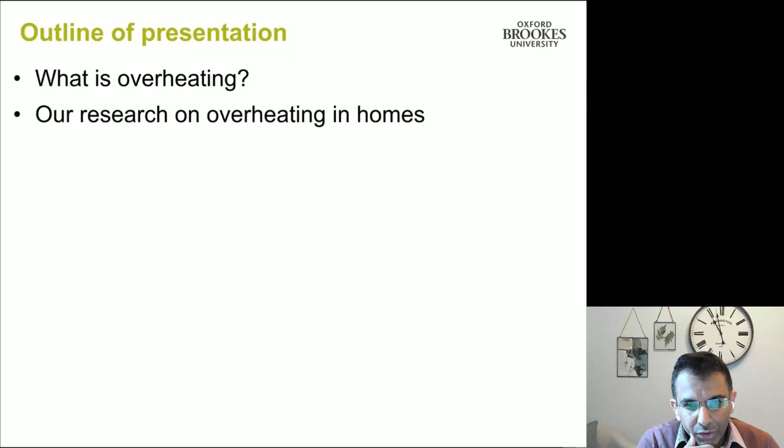What I'd like to do in the lecture is give you an outline of what I'm going to talk about. Start with what overheating really is, talk about our research on overheating in homes, our research on overheating in care settings, how you track this overheating risk, how you deal with overheating through good design, and end with some final thoughts, including knowledge gaps that need to be addressed.

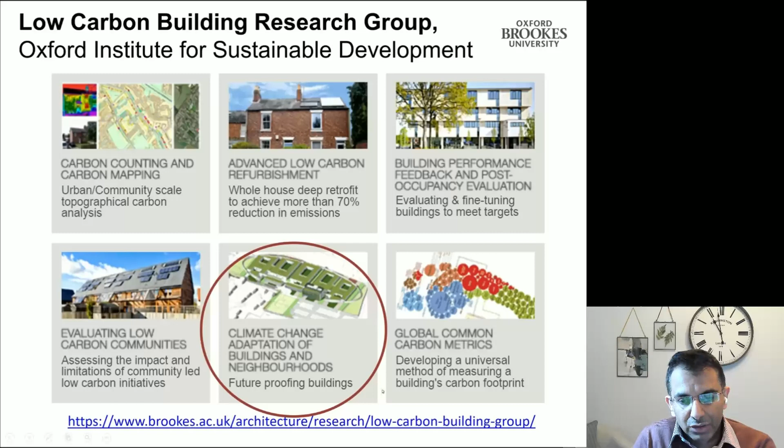Just a quick overview about who we are. I run the Low Carbon Building Research Group and the Oxford Institute for Sustainable Development at Oxford Brookes University. We have quite a few areas of research, but one key area is looking at climate resilience and climate change adaptation, both of buildings and neighborhoods. As part of that, we tend to look at overheating as well.

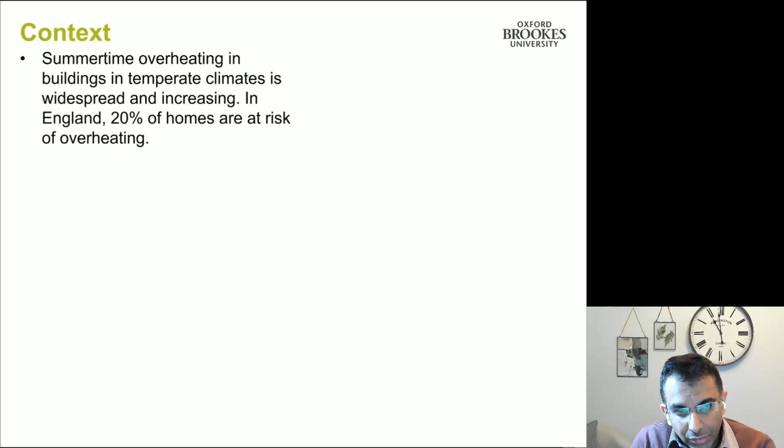Now, the first thing to understand is what overheating really is, because it's becoming a serious concern. This issue of summertime overheating in buildings in temperate climates is becoming widespread and increasing. We know that in England alone, 20% of homes are at risk of overheating today.

We also know that the research community and industry have revealed over the last several years the extent, severity, and causes of summertime overheating in different types of buildings, be it homes, care settings, schools, or offices.

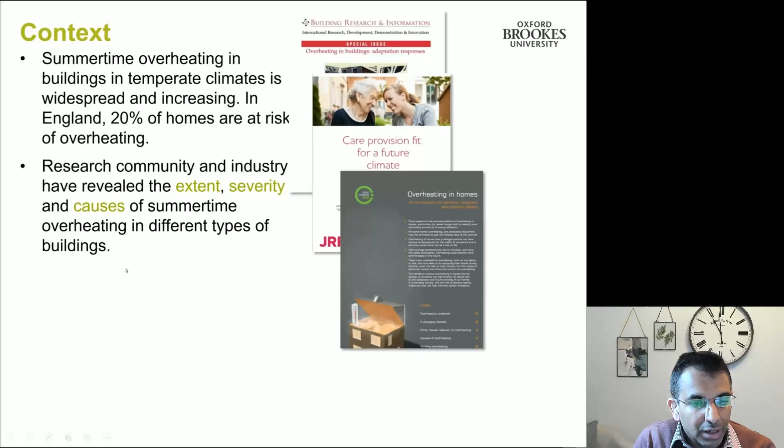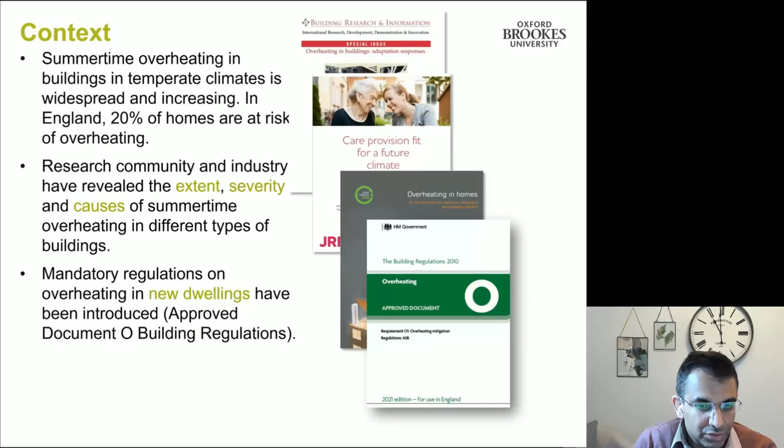We also know that recently government has noticed this, obviously, and has produced mandatory regulations to tackle overheating in new dwellings. This has been introduced through the approved document Part O of building regulations. But the Climate Change Risk Assessment report last year clearly stated that for existing dwellings, there's little incentive to retrofit adaptation measures to reduce overheating risk across the UK, and that really needs to be addressed.

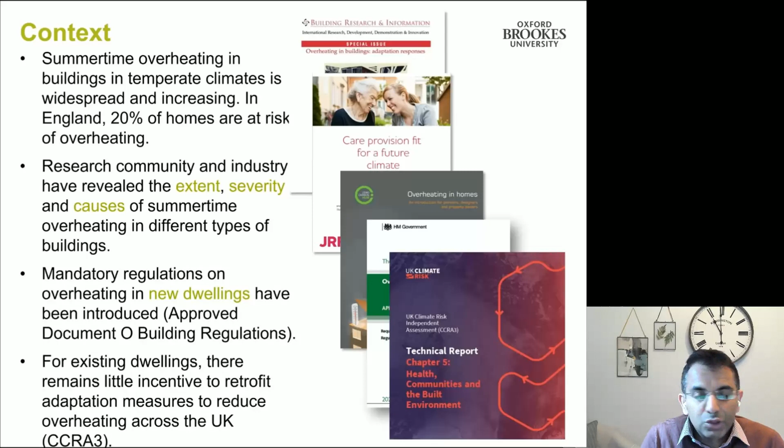This also becomes more evident as it was recently released that threshold temperatures for heat waves have been raised across the UK. In the south of England - Surrey, Berkshire, Buckinghamshire - 28 degrees is now the new limit for declaration of a heat wave, which goes down to 27 degrees in Lincolnshire and 26 degrees in Yorkshire. This happened because the weather year data being considered before was outdated, and now it's been updated to more recent data.

What this shows is that the recognition of when a heat wave is happening, the threshold temperature at which it's judged, is being looked at quite carefully, because that has a direct effect on the occurrence of overheating in buildings.

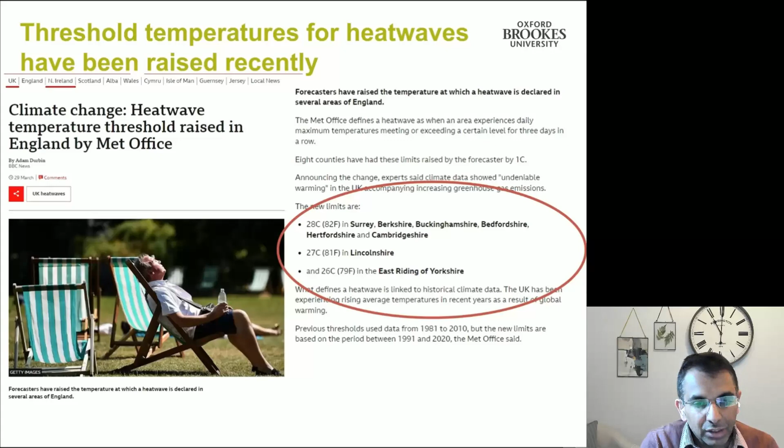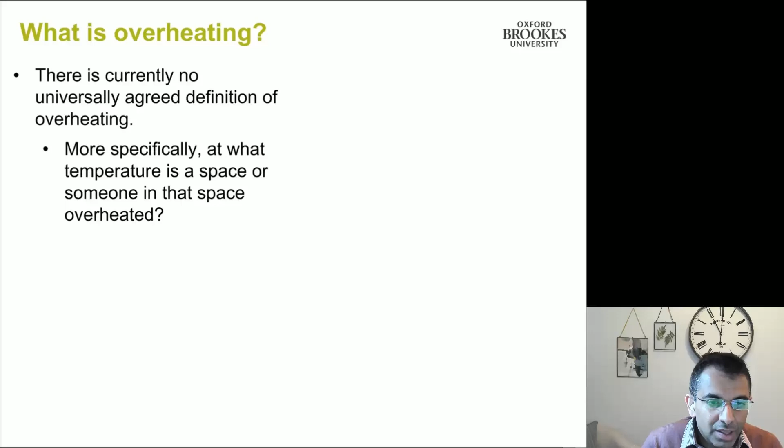Despite all this, there's currently no universally agreed definition of overheating, and more specifically, at what temperature a space or someone in that space is considered overheated. This will get worse as we have a warming climate and temperatures increase.

Overheating is already becoming a design problem for buildings, and it's going to get worse. What we don't want to do is build new homes and buildings today and only wait for them to be retrofitted for tackling overheating later on. We want to build that resilience now.

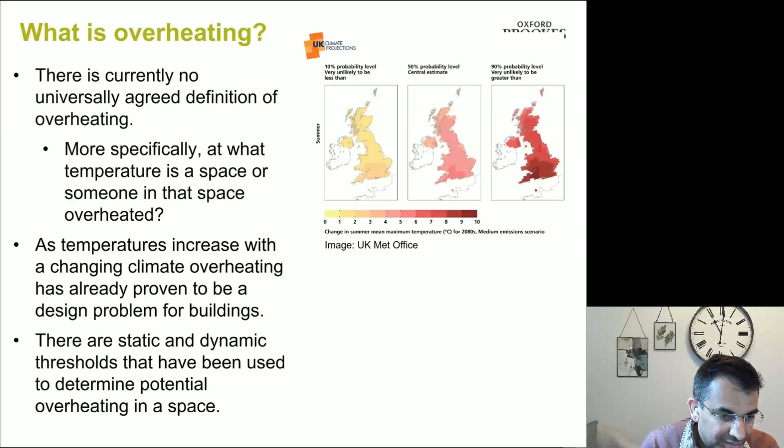There are lots of criteria for looking at overheating. I'm going to go into it shortly, but they could be static or dynamic. They really help in determining the potential risk of overheating in a space. There are several criteria for overheating.

There's CIBSE Guide A, which benchmarks summer peak temperatures and overheating using static thresholds: 26 degrees in bedrooms and 28 degrees in living rooms, whereas schools and offices have their own thresholds. Essentially, it looks at occupied hours over a year and says if more than 1% of annual occupied hours are greater than these thresholds, then the spaces are overheated.

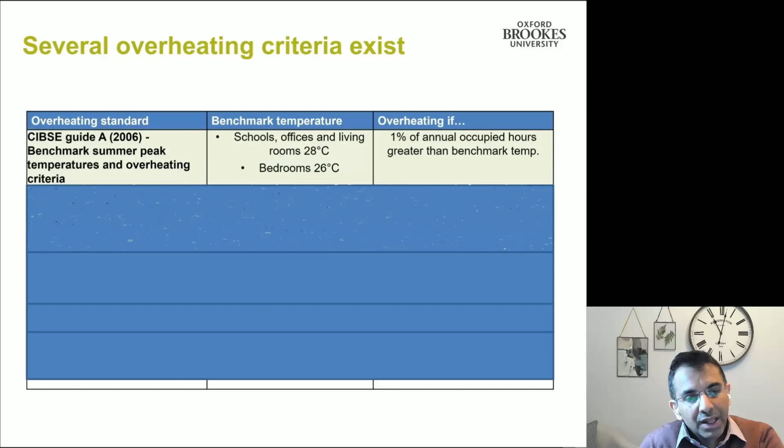There's also the more robust CIBSE TM52, which looks at criteria for defining overheating, mostly in free-running buildings. That relates overheating to the running mean outdoor temperature, which helps calculate the maximum threshold temperature, and then the measured or modeled temperatures are compared against those.

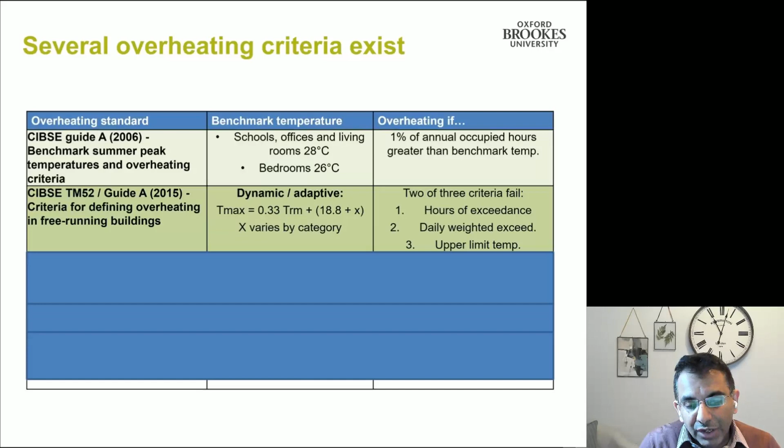If the internal temperatures fail two of these three criteria—hours of exceedance, daily weighted exceedance, or upper limit temperature—then the space is said to be overheated. But this is essentially for free running buildings where adaptive opportunities are available.

There's also the criteria from the Standard Assessment Procedure, which assumes 23.5 degrees C as the threshold, calculated for June, July, and August. If the mean internal temperature is greater than this threshold of 23.5, a high risk of overheating is predicted.

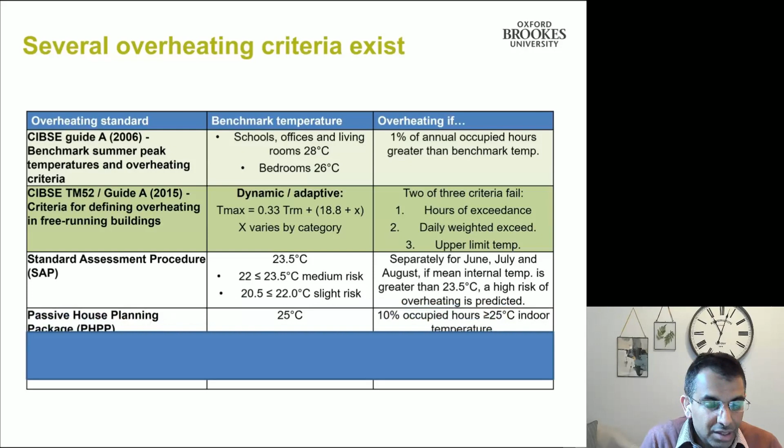Passive House Planning Package also has a threshold, which is 25 degrees. For the moment, it's saying that if 10% of occupied hours are over 25 degrees, then the space is said to be overheated.

There is also the Housing Health and Safety Rating System, which looks at 25 degrees C as the outside temperature and says that adverse health effects increase when external temperatures are more than 25 degrees.

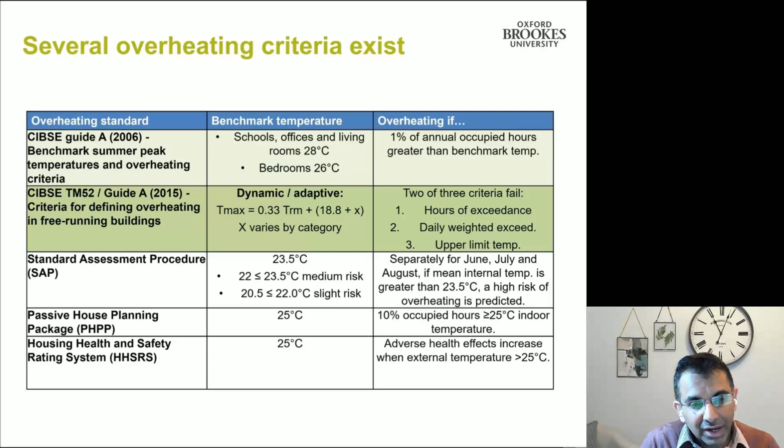So you can see that there's a range of criteria for assessing overheating, and that's also one of the problems. But this is getting increasing recognition clearly, and different criteria may need to be used for different types of buildings. There is some consensus coming up for UK dwellings, at least.

There was guidance released by CIBSE, TM59, which has really given the design methodology for the assessment of overheating risk in homes. This has essentially focused on thermal comfort in living rooms and bedrooms so that sleep is not disturbed. What TM59 is saying is that if bedrooms in the UK have over 1% of annual occupied hours over 26 degrees C, they are deemed to be overheated.

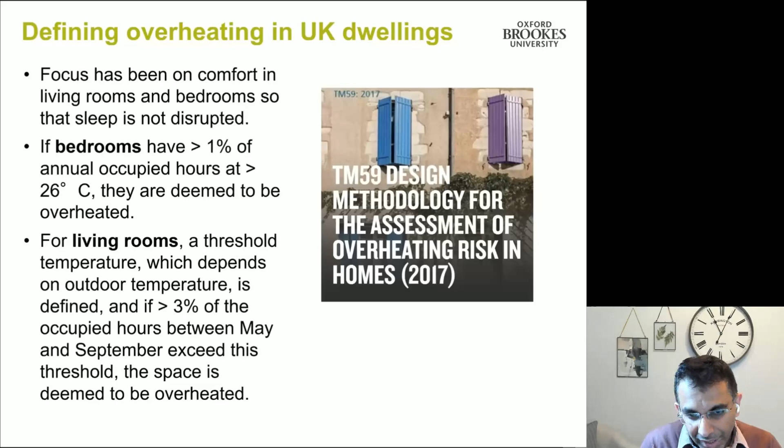For living rooms, a threshold temperature is defined which depends on the running mean outdoor temperature. If over 3% of the occupied hours between May and September exceed this threshold, the space is deemed to be overheated. So there's beginning to be a combination of static criteria and dynamic criteria in determining overheating in UK dwellings.

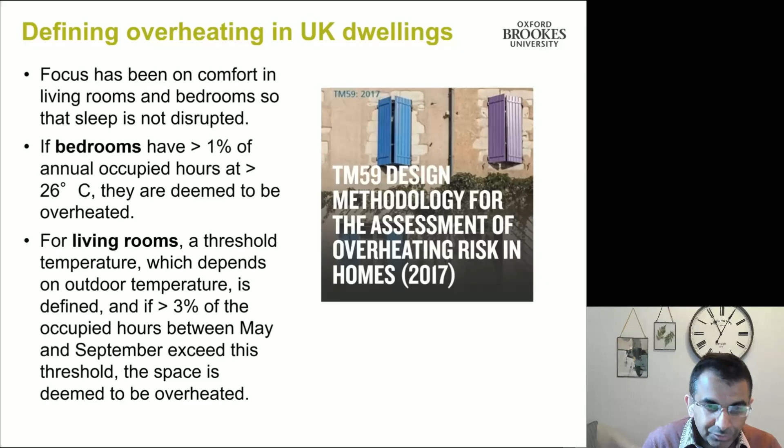Against this, we've been doing a lot of research on identifying the risk of overheating, both in existing and new build homes. We'll quickly run through some of our projects and then focus on a series of projects on care homes. But first on homes, and we started this really in 2009 when I was doing this EPSRC funded project called SNACC, looking at adapting neighborhoods for a changing climate.

We were using a well-established model called DECoRuM, which is a carbon mapping tool, to really look at the adaptation capability by using future weather data to predict the risk of overheating in neighborhoods.

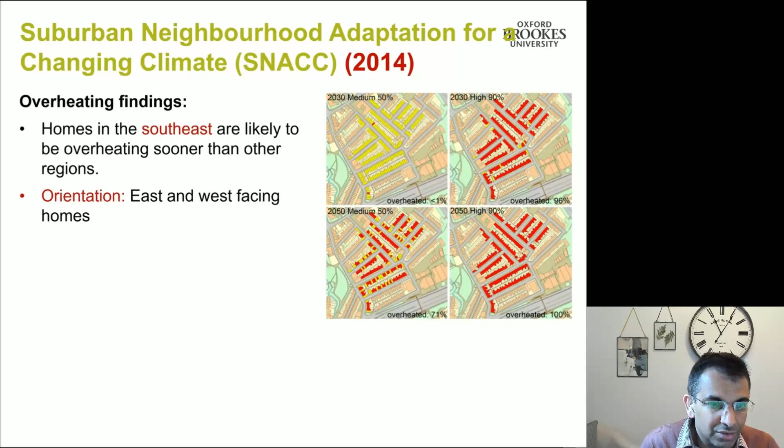Homes on exposed streets, those which have darker pavement, external wall and roof surfaces that are dark, usually increase solar energy absorption. Built form, having either or both a small floor area and limited external wall area, can lead to the risk of overheating.

The location of glazing—if you have roof lights, then you may have more chances of getting overheated. And of course, lightweight versus heavyweight home. So really, it's glazing, shading, ventilation that really mattered.

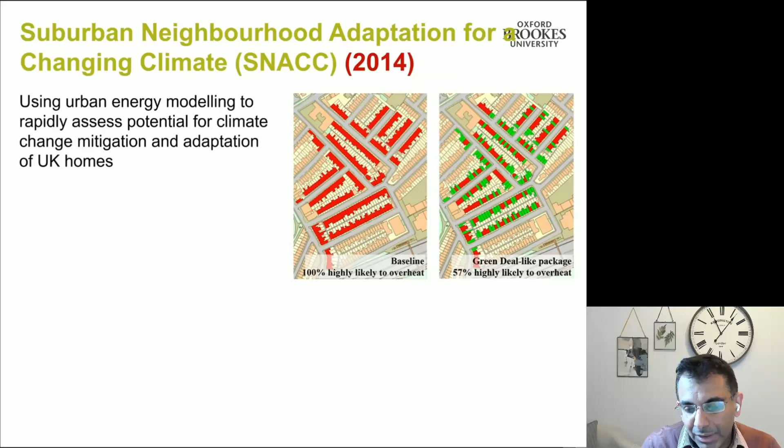We also used that urban energy model to assess the potential for climate change mitigation and adaptation measures, and you can see if those are deployed, then many of the red homes can become green. We used Green Deal at that time because it was seen as one of the retrofitting packages. Essentially what we found was that you need an external insulation package along with some shading and natural ventilation to provide resilience against overheating.

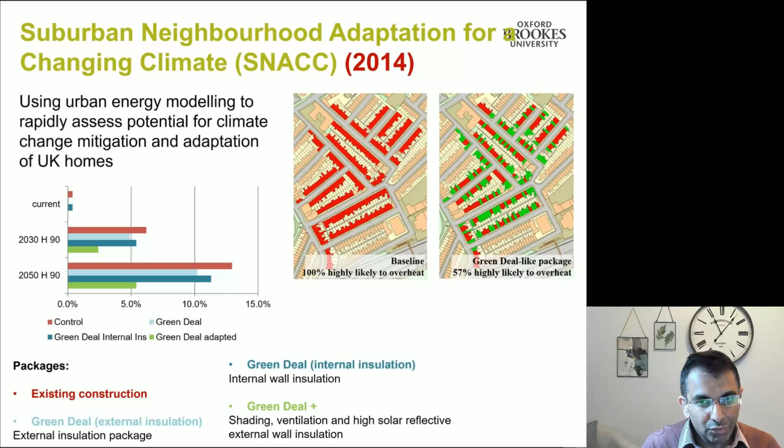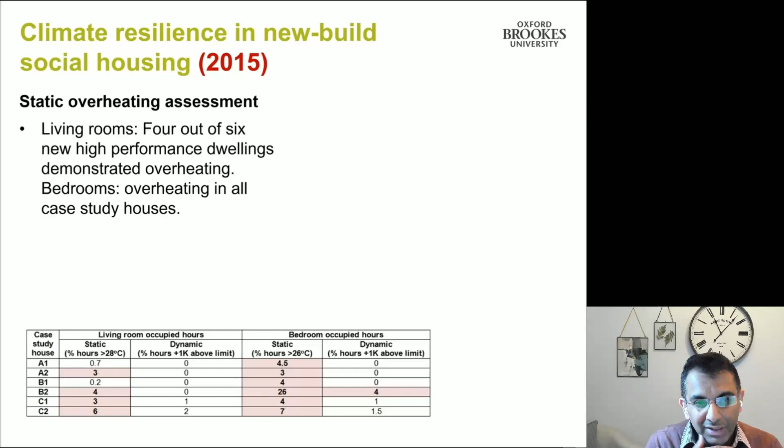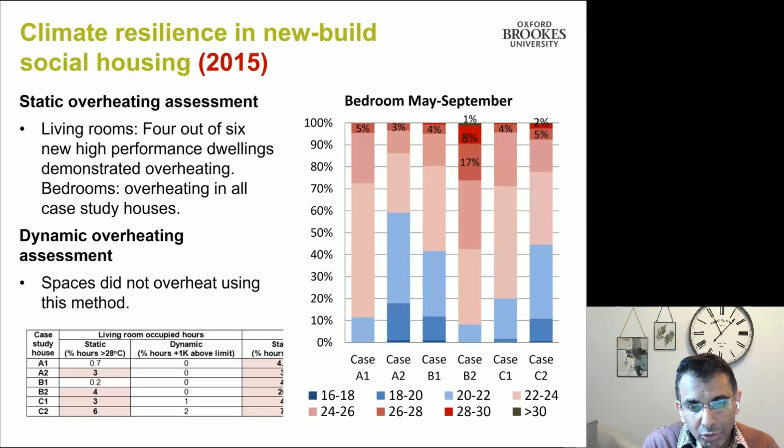This was 2014. In 2015, we looked at some new build social housing which had some vulnerable households, and we were looking at both static and dynamic criteria. The static criteria, which I find more stringent, showed 4 out of 6 dwellings were demonstrating overheating, and bedrooms were really overheating in all the houses. Dynamic overheating assessment showed the spaces were not getting overheated that much using this method.

We then continued this work and looked at more low energy homes across the UK, and interestingly, things started to become much worse in terms of overheating.

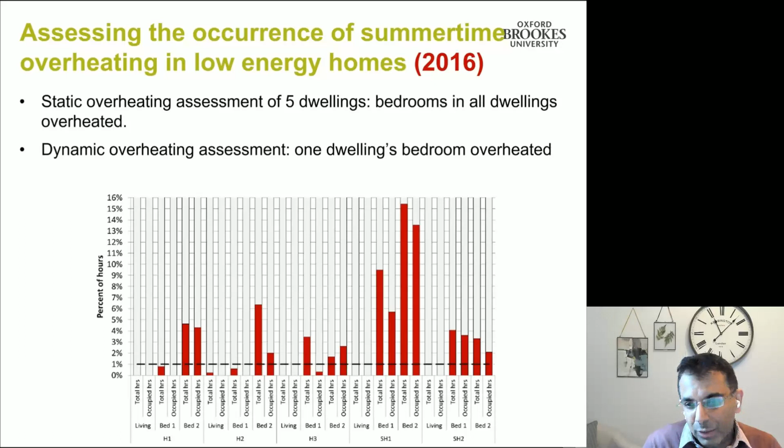Static criteria again: we looked at 5 dwellings and found bedrooms were again overheated. Then dynamic criteria said one dwelling bedroom was overheated.

We then looked at overheating risk in new build, retrofitted, and existing UK dwellings, and this is all published as a paper. We looked at 63 dwellings in terms of their monitored temperature, looking at bedrooms and living rooms, and we found some very interesting things.

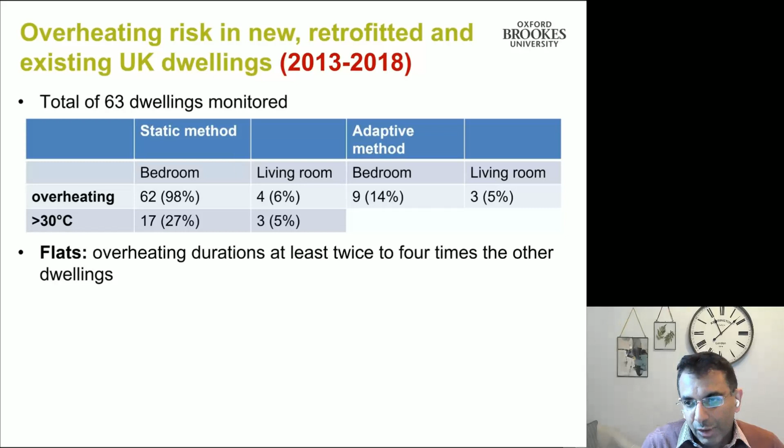The first finding was that in flats, overheating duration was at least twice to 4 times that of other dwellings, because of limited exposed floor area.

Mid-terrace houses have the highest degree of overheating in bedrooms. End terraces had the lowest levels because they could probably lose heat more than mid-terrace houses.

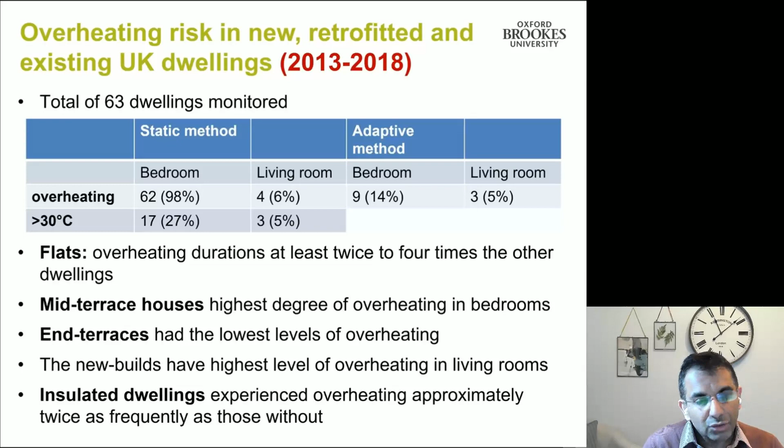New builds had the highest level of overheating in living rooms, and insulated dwellings experienced overheating approximately twice as frequently as those without. There are some interesting things coming out of this kind of meta study.

We continued our work and looked at some modern low energy flats in Surrey - quite expensive flats. We found that 3 out of the 4 flats studied overheated, and the fourth floor, top floor flats were overheated, but not the ground floor.

Overheating again was more prevalent in bedrooms than living rooms. Dynamic overheating assessment showed slightly less occurrence, but flats really stood out as spaces that overheated due to lack of cross ventilation.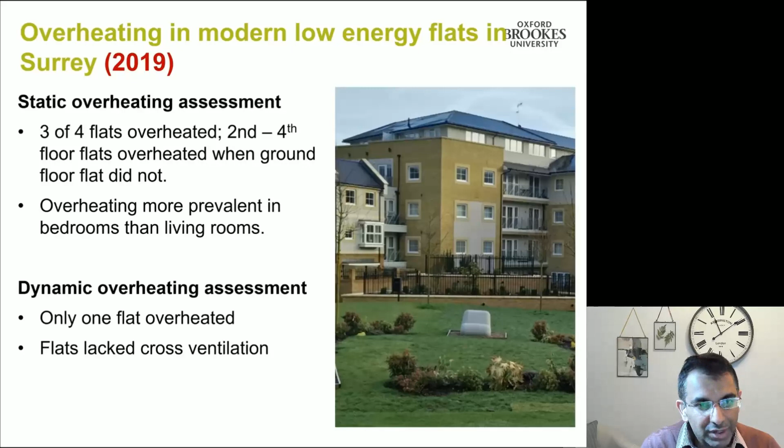We then also looked at another development in York. These were not flats; these were houses, mid-terrace and detached houses. Again, 4 out of the 6 dwellings overheated, with bedrooms again overheating more than living rooms.

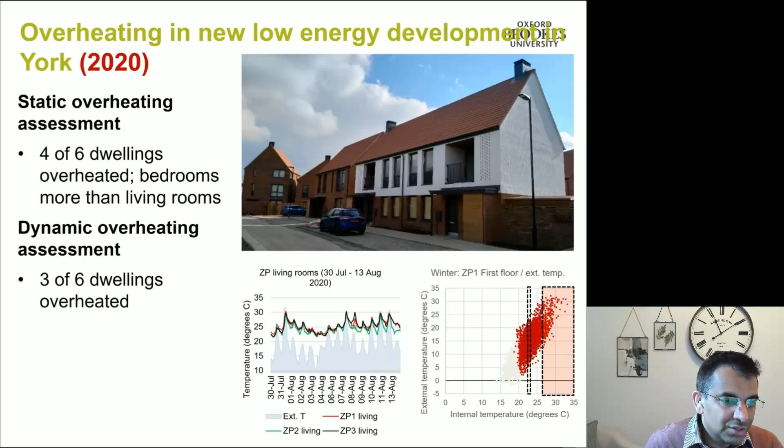This is a matter of concern, that spaces where people sleep during the night are actually overheated more. The dynamic overheating assessment again showed the same thing, that 3 out of 6 dwellings were overheated.

We then carried on with our work and went on to look at the risk of overheating in care settings, which, as we know, are quite vulnerable settings and need to be looked at carefully. The reason we looked at care settings was because there's a direct link between overheating, older people, and the care sector.

Heat-related mortality during heat waves has been found to be highest amongst occupants of residential and nursing homes, despite the presence of care staff that could act to protect vulnerable residents. So care homes are really vulnerable settings that need to be protected from summertime overheating.

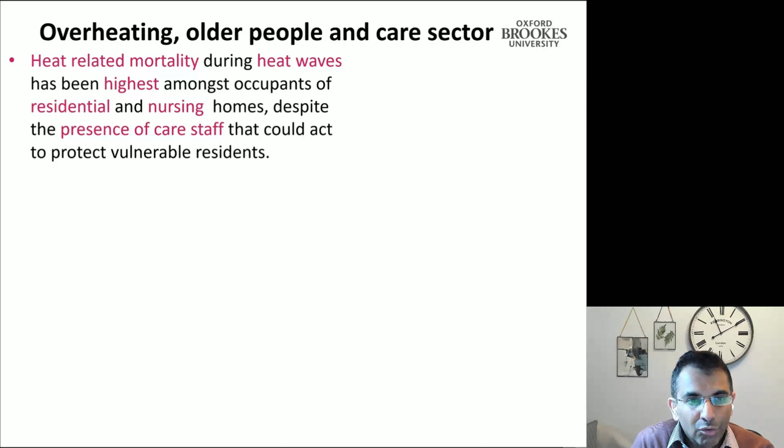This became evident in the previous climate change risk assessment report from 2017, and also the recent one, along with the National Adaptation Program, which has identified summertime overheating in care settings as a key risk and research priority for the health and social care system.

Vulnerability of care settings has of course been further exposed during COVID-19. If COVID-19 has proved to be a risk, I think overheating is also going to be a big risk as we move forward, especially for the care sector.

We also know that care homes are vulnerable to energy price increases, and many of these care homes are facing huge electricity bills, so maladaptation is not possible. We can't just say there's overheating, let's do air conditioning - that's not a solution. We have to go for increased passive ventilation or cross flow ventilation where we can.

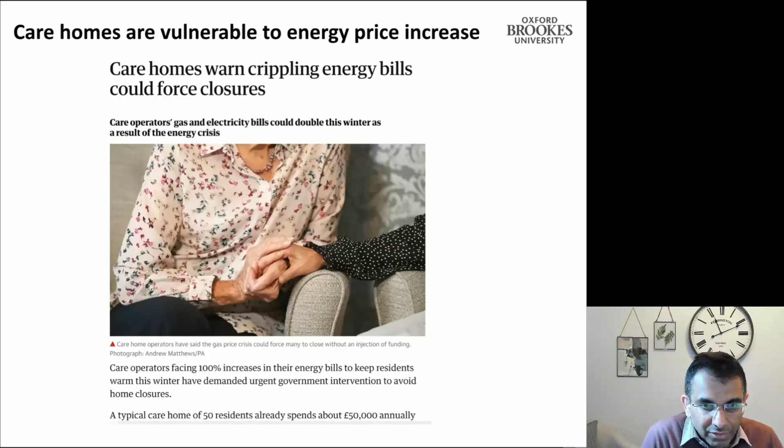Another problem is that care homes have been designed, built, and operated with the aim of keeping residents comfortably warm all year round, which probably requires a culture change, because in warm weather they might need to change ingrained practices in care homes.

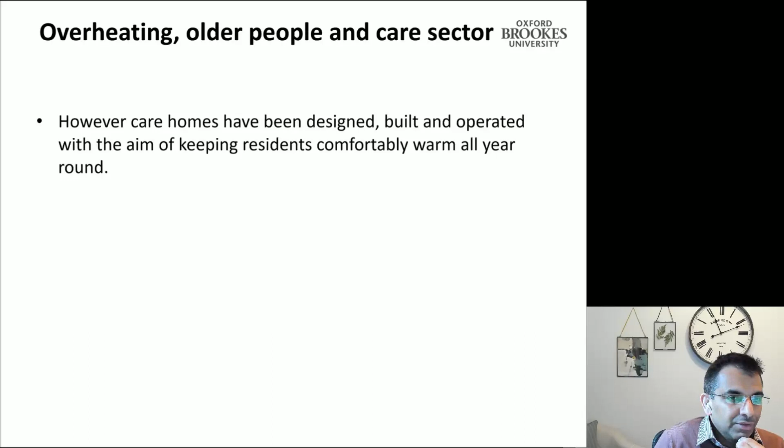There's also very limited research on assessing the prevalence of summertime overheating in care settings, both in the UK and internationally. There is a relative lack of empirical evidence there, which needs to be gathered.

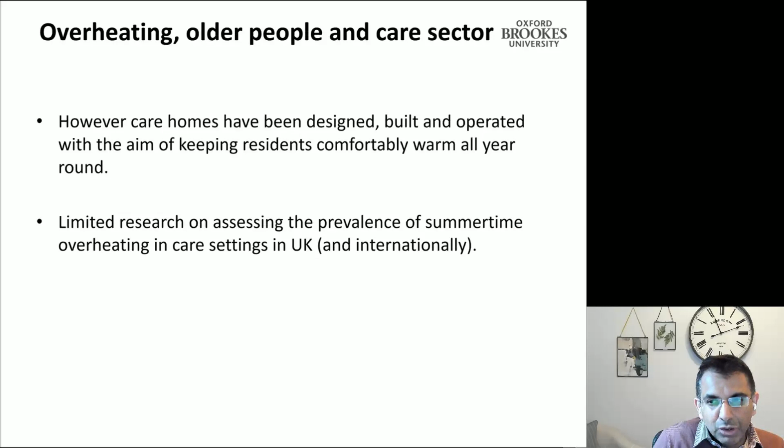Our work has really, since about 2015, focused on climate resilience of care settings. We've been undertaking a portfolio of work in this area. I started off by leading this project for the Joseph Rowntree Foundation, looking at 4 case studies across 2015-16.

We then went on to do a NERC-funded Research Council project, looking with partners at University College London and LSHTM, a pilot study of London-based care homes. Then another project looking at a nationwide study of care homes.

Starting with the first project, the JRF study, we looked at four care settings. Two are care homes across the country, as you can see, and two are extra care homes.

The difference between the two is that care homes are really single bedrooms with access to on-site care services, whereas extra care homes are more independent - rented or purchased flats or bungalows, designed for people with mobility difficulties, with some help and support available in an emergency.

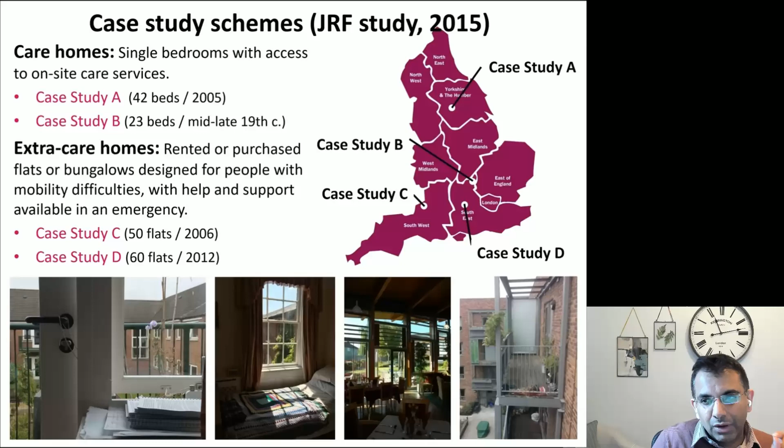So we looked at these four care settings. It was one of the first studies looking at overheating in care settings. And what we found is very interesting: most of the spaces are overheated, whether you look at adaptive method, dynamic method, or static method.

What we found is published as a report which is downloadable. For the static overheating assessment, we were looking at about 33 spaces, and out of those, 25 were overheated, with the highest overheating in the residence rooms. As per dynamic overheating assessment, slightly less, but 7 out of 33 rooms overheated.

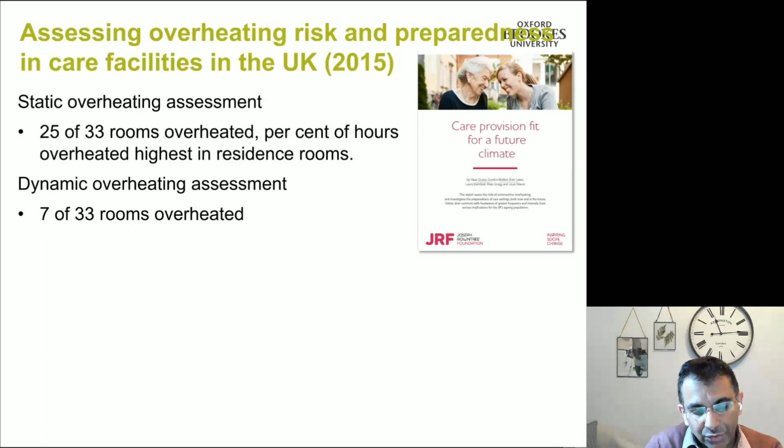Remember, in care settings there is relatively less scope for adaptation because health and safety and other concerns take over. So you can't open the window to the level you would want to - there are restrictors, it only opens about 100 mm.

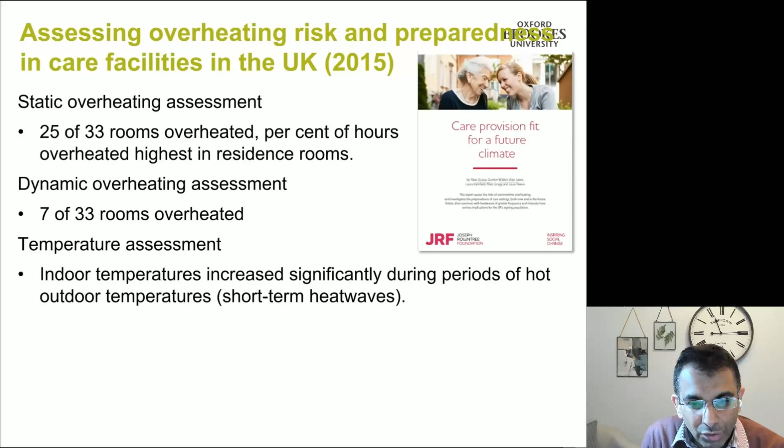When we went into detailed monitoring, we found that indoor temperatures increased significantly during periods of hot outdoor temperatures, especially short-term heat waves - not the heat wave I was talking about previously, over 3 days before one is declared, but really short-term occurrences of hot weather, and indoor temperatures increased significantly.

During the heat waves, none of the residential communal areas in the case studies remained below 26 degrees. Interestingly, that's the threshold temperature suggested by the heat wave plan for England, which says at least one area within the care setting should be below this temperature to provide a cool area to reduce the likelihood of heat-related illness. But none of the spaces we monitored remained below 26 - they were all higher than that.

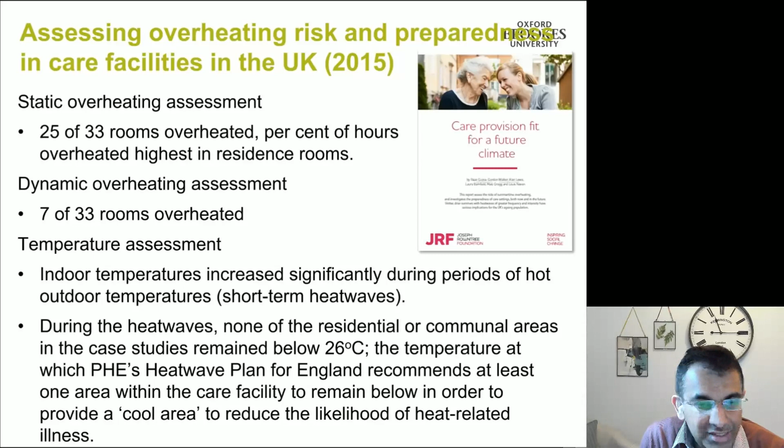So some very interesting results came from that first project, which led us to the second project with the Natural Environment Research Council, where we undertook a pilot study of care homes with support from the Care Quality Commission, the regulator of care settings. We did feasibility work developing new methods, knowledge, and insights to enable care provision to become more resilient to rising heat stress, using environmental monitoring, thermal comfort surveys, interviews with care staff and residents, and modeling to assess future overheating risks along with health outcomes of overheating.

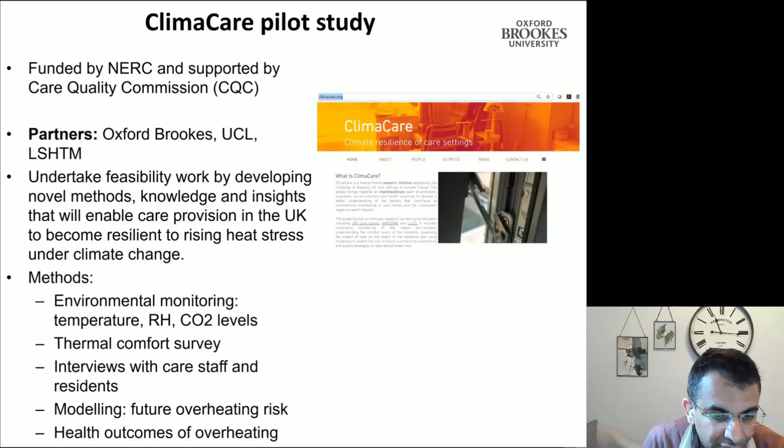We looked at 5 care settings across London. Some of them were quite old, heavyweight buildings, others were quite new, recently built, and some from the 1980s - so we had a good mix, with 5 care settings located in London but with very distinct characteristics of building age and building form.

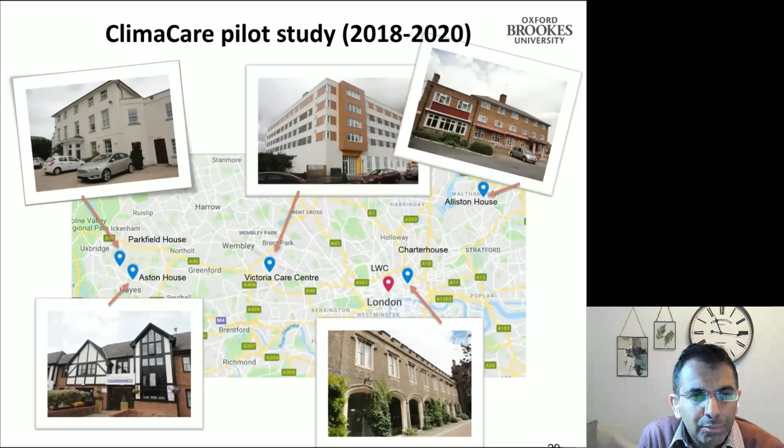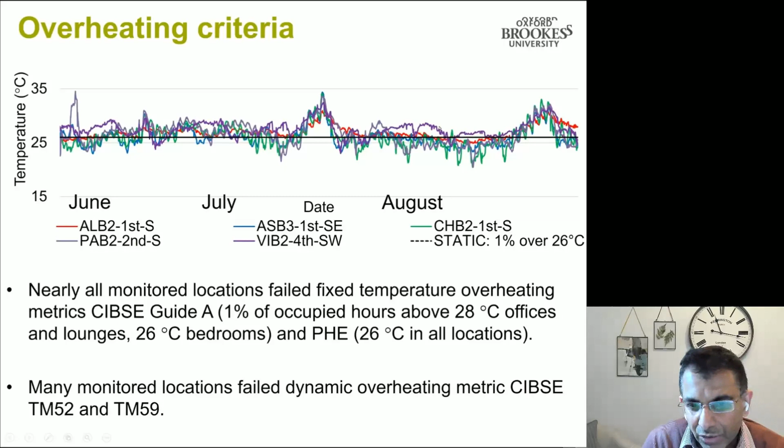What we found across all the care homes is really interesting - we did that in 2018-19 - that all monitored locations were having fixed temperature overheating using the CIBSE Guide A, with temperatures above 28 and 26 degrees for more than 1% of occupied hours. Many of these monitored locations even failed the dynamic overheating metric. You can clearly see the black line here is the static threshold, and how temperatures are above that across different spaces of care settings.

We also ran thermal comfort surveys, and some interesting things appeared. We were looking at staff and residents in care homes, trying to see the perception of comfort, and found there was disparity between indoor temperatures that staff considered warm and hot, and those that residents found warm and hot. Residents were not perceiving higher temperatures as much as staff, who were more active.

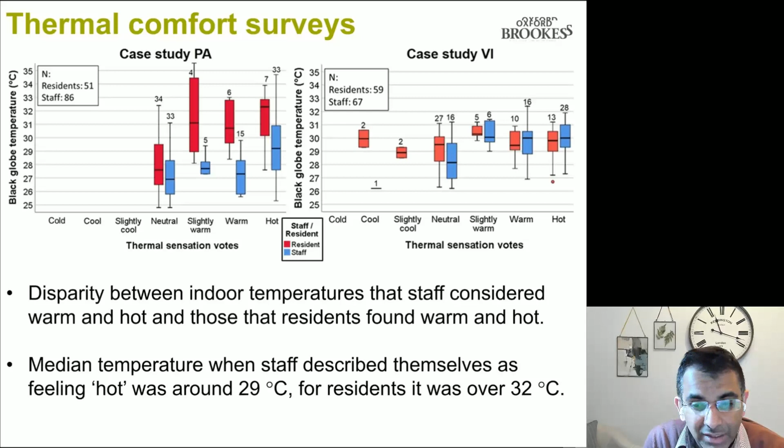The median temperature when staff described themselves as feeling hot was around 29 degrees C, while for residents it was 32 degrees C. So you can see that some external action is necessary, because residents are not able to identify when the threshold for overheating gets crossed. Care settings are such hybrid buildings - they've got residents and staff with quite different expectations of the indoor thermal environment.

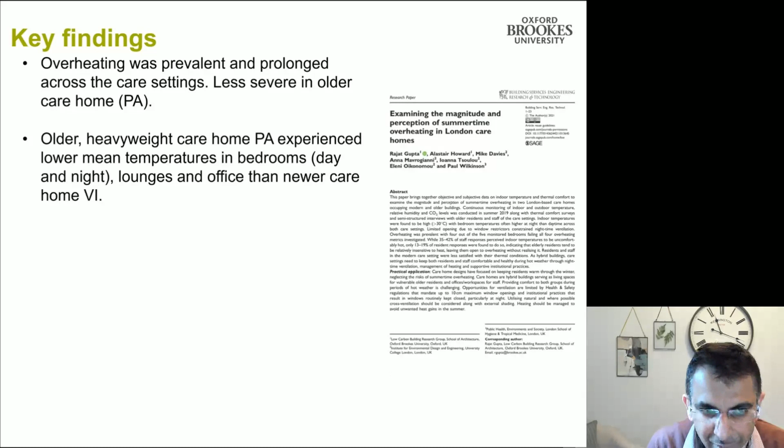The key findings from the pilot study of 2 care homes, building upon the first JRF study, was that overheating was found to be prevalent and prolonged across all the care settings. Interestingly, it was less severe in the older care home, which also offered scope for ventilation. The older heavyweight care home experienced lower mean temperatures in bedrooms and across different spaces, lounges and offices, than the newer care homes.

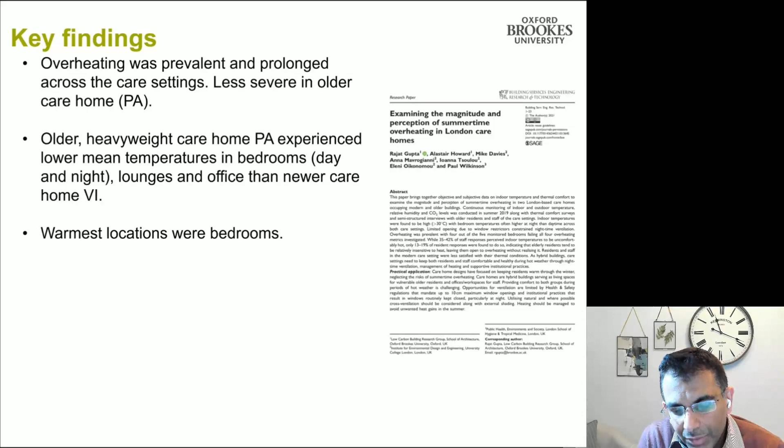Across all the care settings, the warmest locations were the bedrooms. I think it's really interesting that even in the homes, we found bedrooms to be the warmer spaces, and even in the care settings, they're coming across the same. Average bedroom temperatures were higher at night. Again, it's not that bedrooms overheat more than living rooms, but the temperatures are higher when you're sleeping.

This was because bedrooms were occupied with doors and windows closed. They had single-sided ventilation. Carers would spend time in lounges more than in bedrooms, and they were more likely to implement strategies for cooling when in the lounges. So you can see that it's a combination of the physical aspects of the care setting along with the practices deployed in care settings that is really accentuating this risk of overheating in care homes.

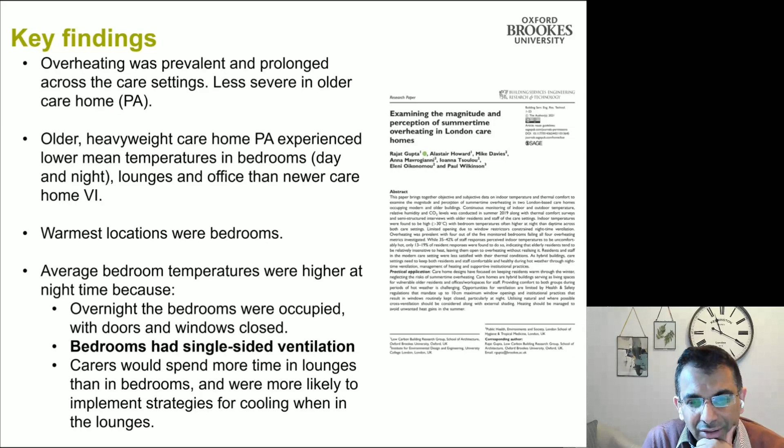The ongoing project that we're doing is an extension of the pilot study from NERC, and this is a nationwide study that we are doing. This is still happening, it goes into 2023. It's again Oxford Brookes, UCL, LSHTM doing it together. We are trying to quantify climate-related heat risk in care provision at a national scale, moving on from a case study based to a national kind of study.

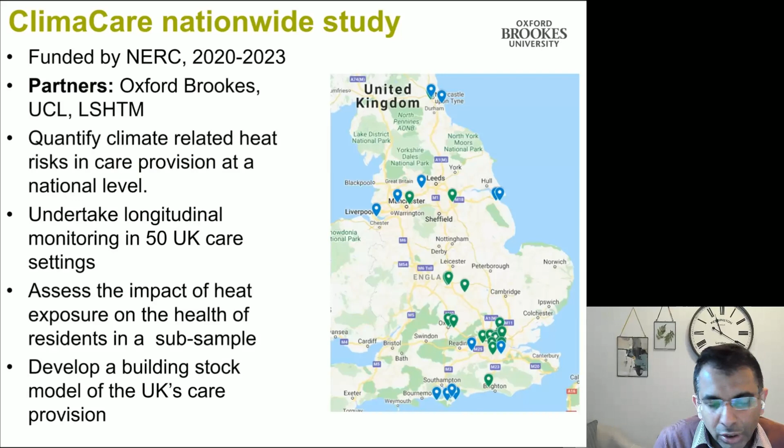We are doing longitudinal monitoring, and our aim is to do 50 care settings. We've got about 34 recruited at the moment. We are assessing the impact of heat exposure also on the health of residents in a subsample, and using all this empirical data to develop a building stock model of UK's care provision.

These are some very preliminary results looking at some of those care homes that we recruited. These results are from August, September 2021, so they're not really peak summer, it's towards the end of the summer. What's really interesting is that the maximum temperatures are going above 29, hitting really 31 degrees in some of the bedrooms. And this is not even kind of summer, it's towards the end of the summer. We'll have better results from this summer.

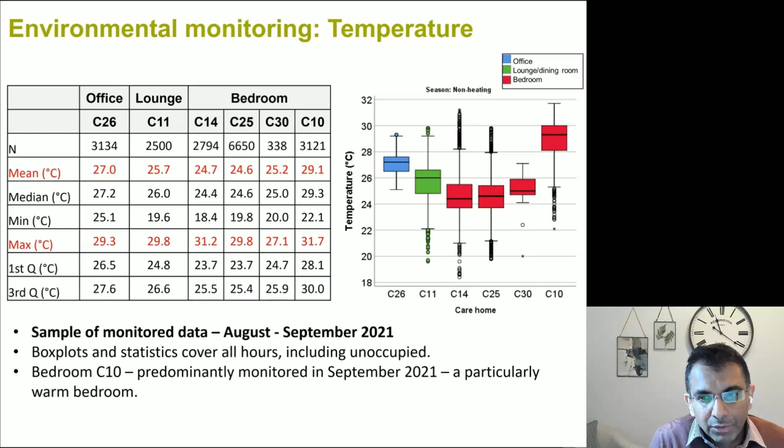Predominantly, the bedroom C10 is a pretty warm bedroom that we found. I think it's worth noting that this is really happening because of limited ventilation that's happening across these spaces.

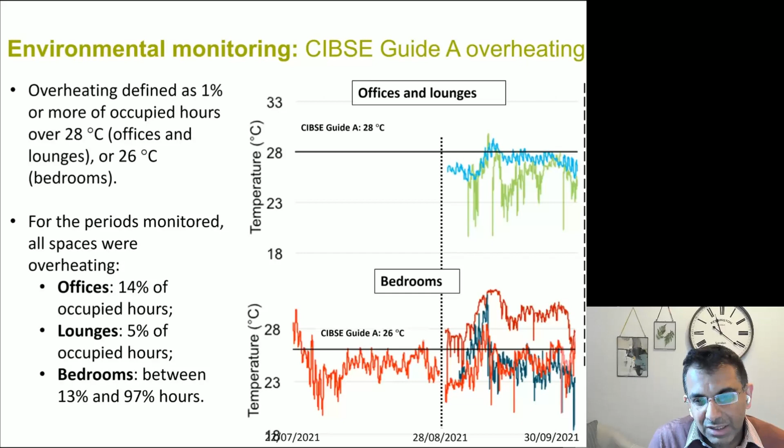Then we looked at the overheating risk, and again we looked at static criteria for care settings, and we found that for the periods monitored, all spaces were found to be overheated. Offices had 14% of occupied hours that were overheated, lounges had 5%, and bedrooms were between 13 and 97%. So clearly this is a current and serious risk that needs to be tackled.

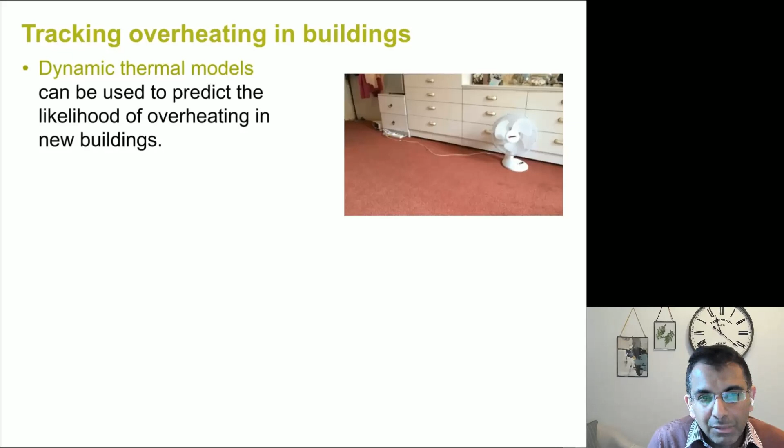So how do you first track overheating? I think one of the ways I would suggest is by developing indicators. Government is very interested in this, and this also helps in really seeing what is happening. The way it's tracked at the moment is dynamic thermal models are used to predict the likelihood of overheating in new buildings, and measurements and inspections are used to identify overheating in existing buildings, which is what, to some extent, we have been doing as well.

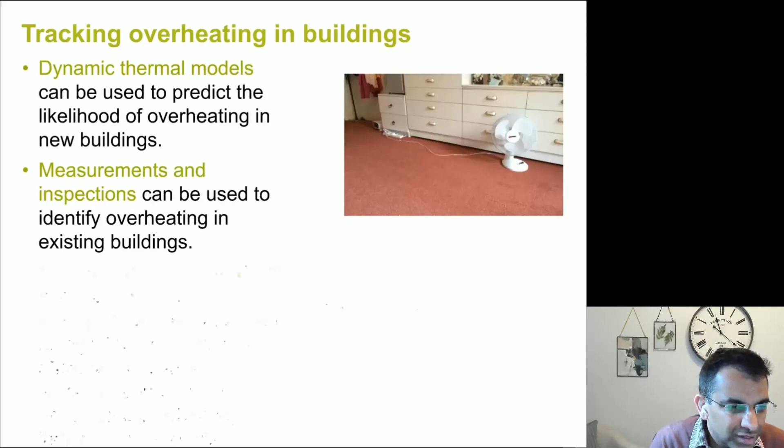The physical form of buildings matters, definitely, but I really want to emphasize that the way people occupy them is equally important, along with changes in the climate. So a socio-technical approach to developing overheating indicators is probably necessary. There are some indicators out there which are being used and considered through the climate change risk assessment as well, and they range from areas of urban green space to heat-related deaths per year.

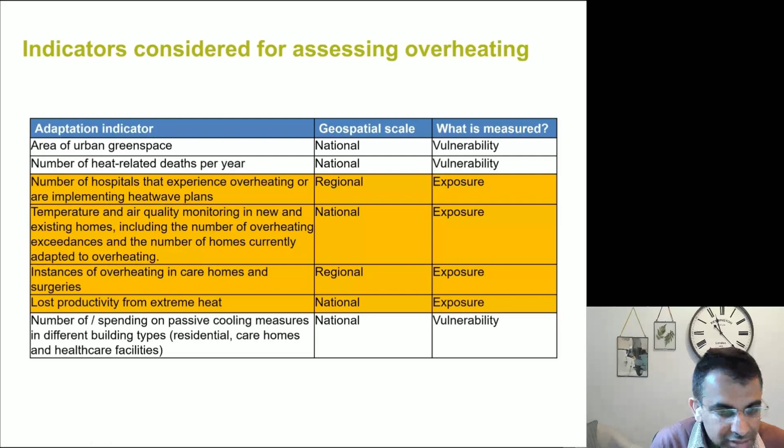But from a passive design aspect, number of hospitals that experience overheating or are implementing heatwave plans, instances of overheating in care homes and surgeries, lost productivity from extreme heat, and temperature and air quality monitoring and how much of that is prevalent across different care homes could also be tracked. This I find really interesting: number of and spending on passive cooling measures in different building types, care homes, healthcare facilities, that could also be used as one of the indicators. We tend to look more at heat-related deaths as an indicator, but what I'm arguing for here is there are other indicators as well, such as those passive cooling measures.

So how can you tackle this through passive measures and user-centric operation? I would say presence of cross ventilation is essential. We need to look at extent of window opening.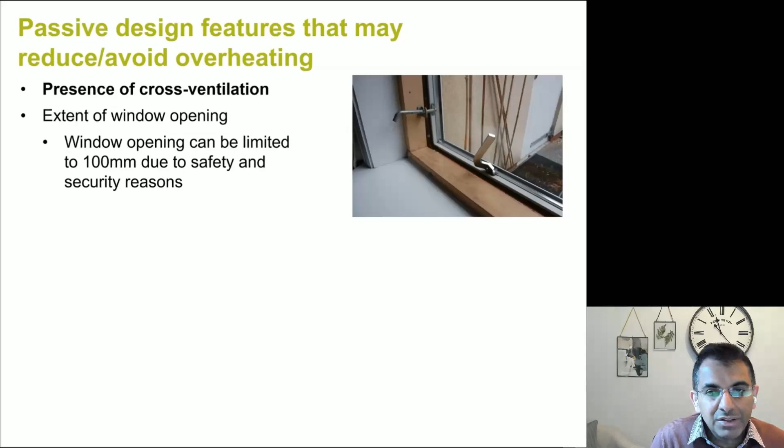This can be limited to 100, as I said, due to safety and security reasons, but this needs to be looked at carefully.

Presence of thermal mass in heavyweight buildings will make a difference. External shading will matter, especially on the south, west and east facing facades, and can be of different types. Shallow plans are preferable rather than deep plans, and light colored surfaces on the outside would radiate heat off the building.

Corridors need to be adequately ventilated, because often they're a route for hot water pipes, and there's a lot of chance of unwanted summer gains from those pipes. Not just at the building level, green and blue infrastructures, planting and water features can also help reduce urban heat. Those are some of the passive measures that really need to be looked at.

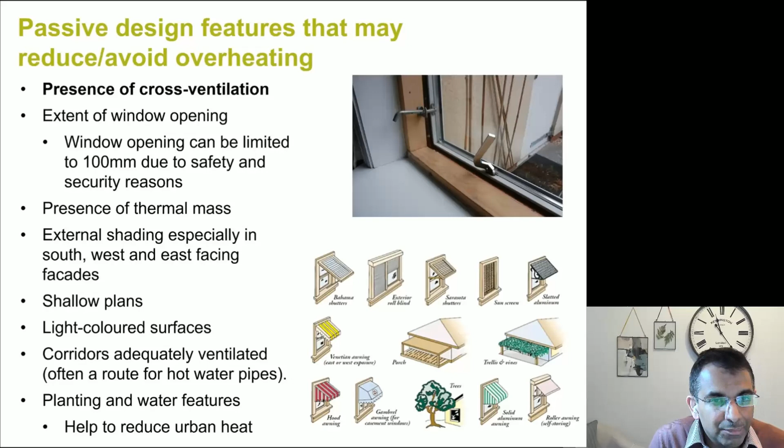Ventilation here is key. Then, not just the building, we also have to empower occupants to manage overheating, and there are various ways of doing that.

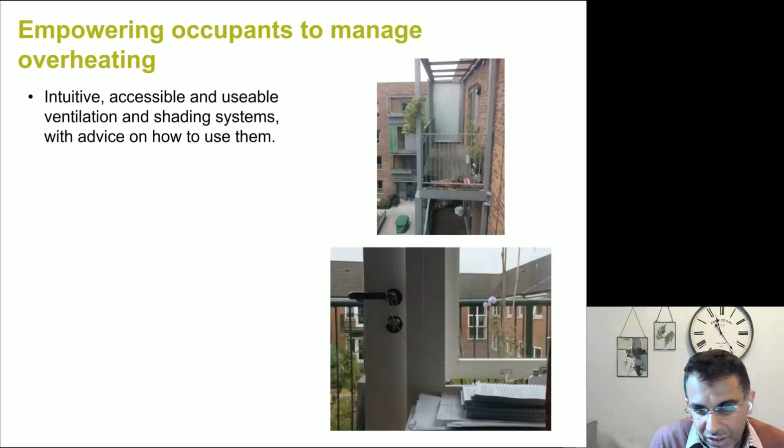We need an intuitive, accessible, and usable ventilation and shading system with advice on how to use it—sometimes it's counterintuitive. We might need openings of different sizes to offer flexibility, some that people of certain age groups can open easily, and we need user manuals on staying cool in summer.

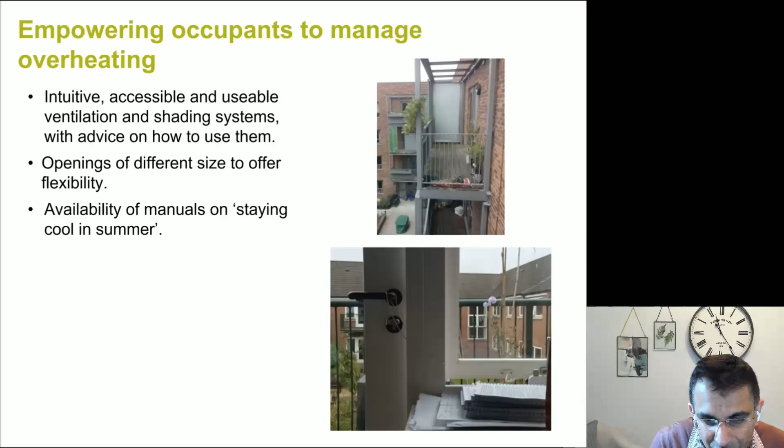We also need provision of shaded balconies or other communal spaces where people, especially vulnerable occupants, can escape from heat—what we call cool rooms.

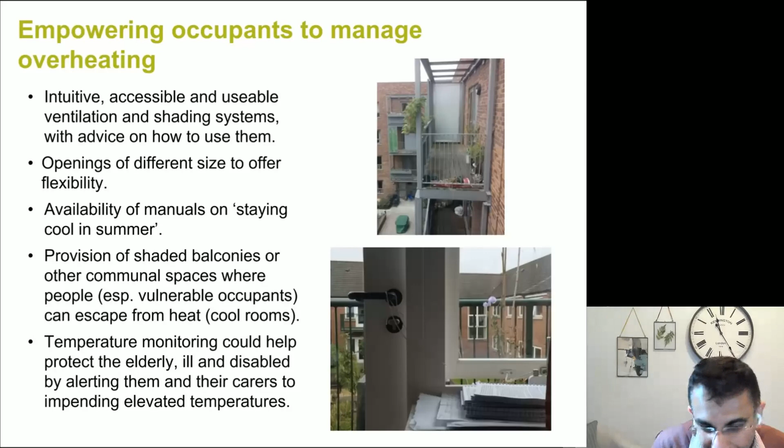We shouldn't undermine the power of gathering data. Temperature monitoring could help protect the elderly, ill, and disabled by alerting them and their carers to impending elevated temperatures. That data flow can help with decision making quickly.

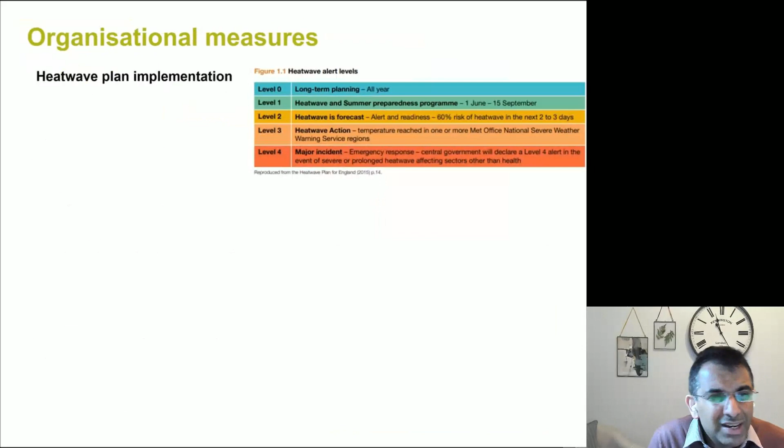There are organizational measures as well, looking at heat wave plan implementation, what alert level response is done, and whether it was successful or a failure.

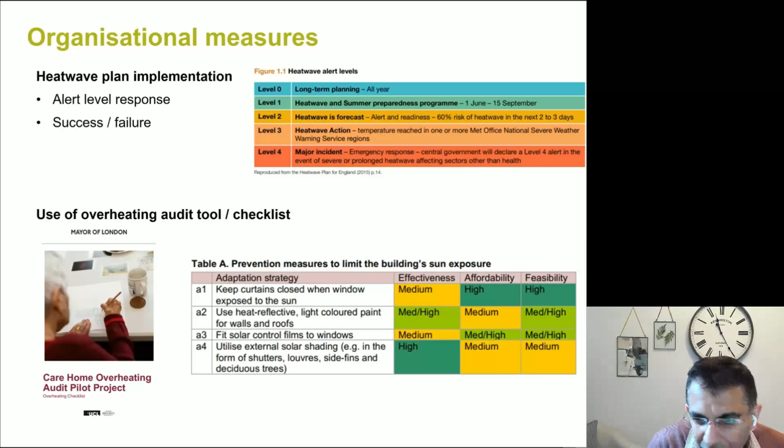We've been working with UCL to develop this overheating audit checklist and tool for care homes, which could be used to look at different adaptation strategies for overheating—their effectiveness, affordability, and feasibility.

So my final thoughts—I want to end with some insights about knowledge and data gaps, which can help with the conference discussions as well. Overheating indicators and guidance on retrofit and remodeling are limited.

I think we have to focus on existing stock. The new can and should be designed to reduce overheating risk, but it's the existing stock that we really need to address. We urgently need regulations and supporting guidance to ensure that retrofit measures improve heat resilience, and for that, I firmly believe passive cooling provision—especially through natural ventilation and shading—is necessary.

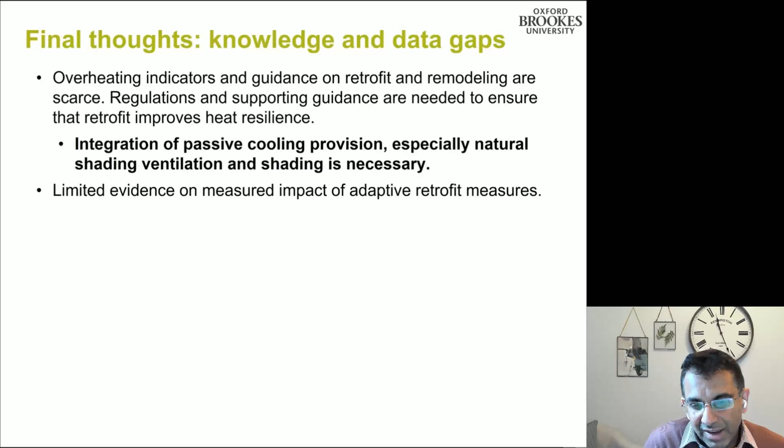We have limited evidence on the measured impact of these adaptive retrofit measures. So for those buildings where these measures have been deployed, we need to know what difference that made. We also need to know the number of buildings currently adapted to overheating.

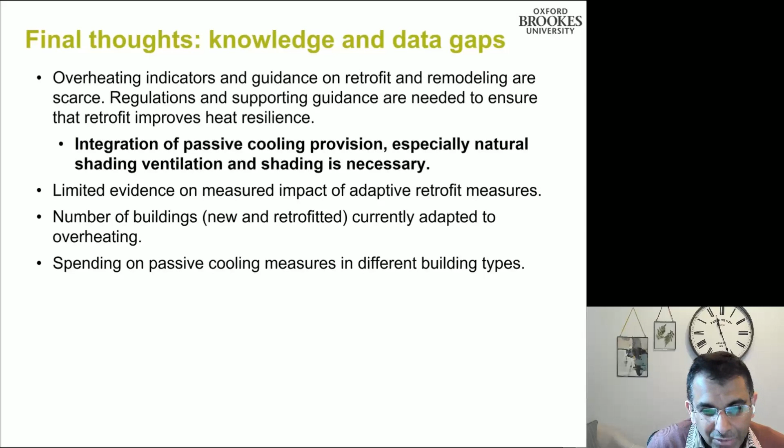There is relatively less availability of good practice in dealing with overheating. It might be worth tracking spending on passive cooling measures in different building types, especially existing buildings.

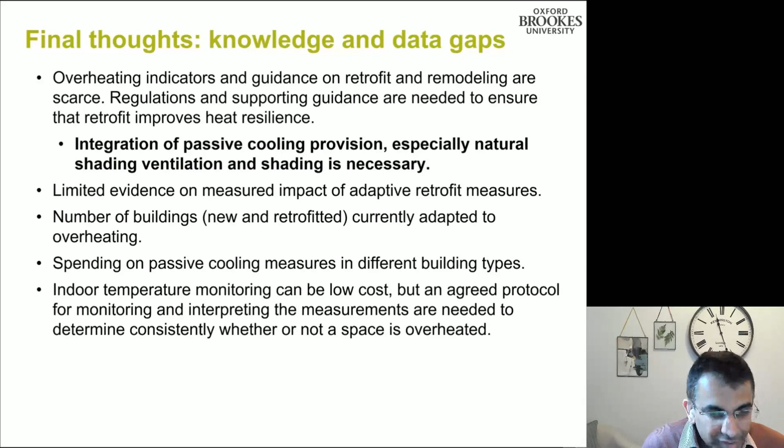Indoor temperature monitoring, which I've argued for, must be encouraged. It's low cost, but we also need an agreed protocol not just for monitoring, but also for interpreting those measurements so we consistently determine whether or not a space is overheated. I think there's some work to be done there.

Finally, designers must anticipate future climatic conditions and changes, such as increased daytime occupancy, for new buildings that may last 60 to 150 years. We must encourage designers to design buildings with that future climate risk in mind, not something that can be pushed down the years—it needs to be looked at now.

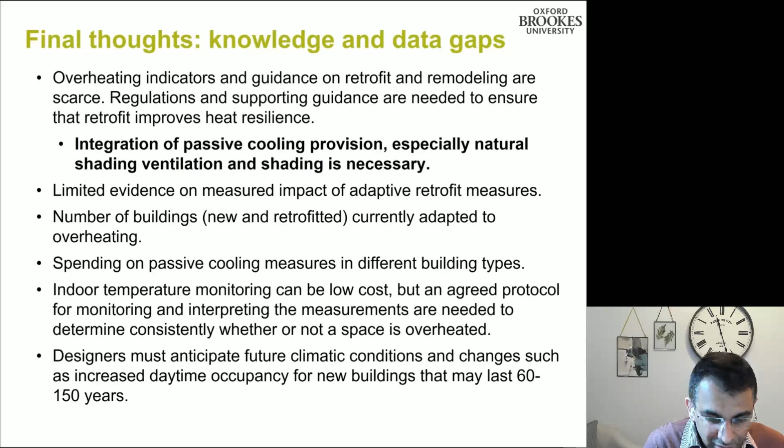My final point would be that evidence on the implementation of heat wave plans in different types of building sectors needs to be looked at and refined where necessary, because not everything suggested in the heat wave plan may be implementable.

I'm going to stop here. Thank you for listening, and I hope this gives you some bits to talk about, discuss, and address some of these knowledge and data gaps that we have in dealing with overheating.